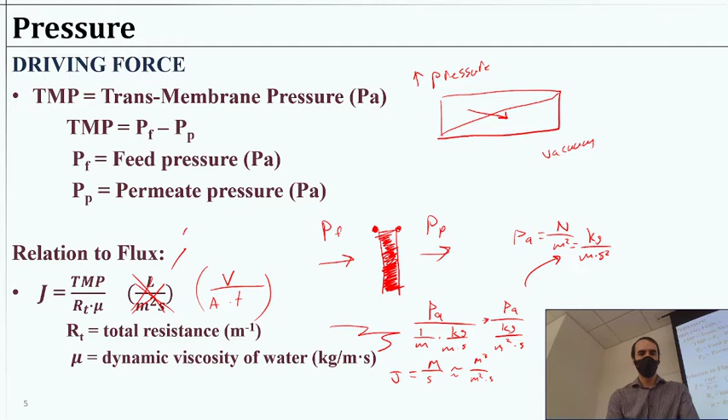Okay, so now we could maybe look at it, but okay, anyhow.

Membranes, generally, if we were to take a look at them, almost every membrane is going to have two features. First, the separation layer, the very thin component that's actually preventing small stuff from getting through, and then a support layer acting as a layer that's not doing any separation. We don't want anything getting stuck in that layer. We want water to flow as freely as possible through it, so it's going to be very permeable as much as we can, but it's going to keep a structure and support system for the separation layer, so that the separation layer doesn't experience any breaks or cracks from the pressure with particles.

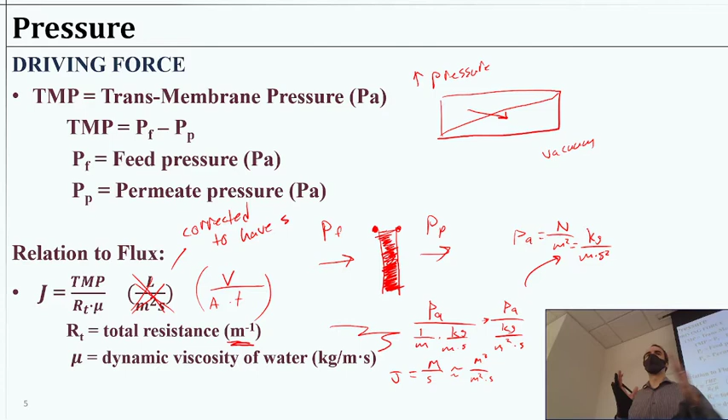If we go back a step and look at our flux equation as it relates to the pressure and the resistance, this resistance term, RT, that total resistance, the units are per meter. So this is some description of how much resistance the water is encountering per distance it's going. So the water is getting slowed down, lagged, whatever you want to call it, as a function of how far it has to make its way through that, which will be obvious when you think about it.

When we operate a membrane, we definitely want to operate it so particles flow in a direction where they encounter the separation layer first, not the support layer first. That way particles get stuck on the outside of the separation layer and flow away with the retentate stream. If we operated the other way, they may get stuck inside the support layer and start clogging it up pretty bad, making it hard to remove.

Another thing to consider in membrane operation, which is pretty much universal, is fouling. Junk gets stuck onto the filter. The stuff we're trying to remove is removed, but where does it go? We'd like to wash it all away, but sometimes it accumulates, and sometimes microorganisms get involved. Essentially, a layer of particles deposits on top of the membrane, and as we keep filtering we get more and more layers until we get what we call a cake. So we're doing cake filtration through that cake of foulants, which acts like a membrane or separation layer itself. That plays a role when we talk about resistance.

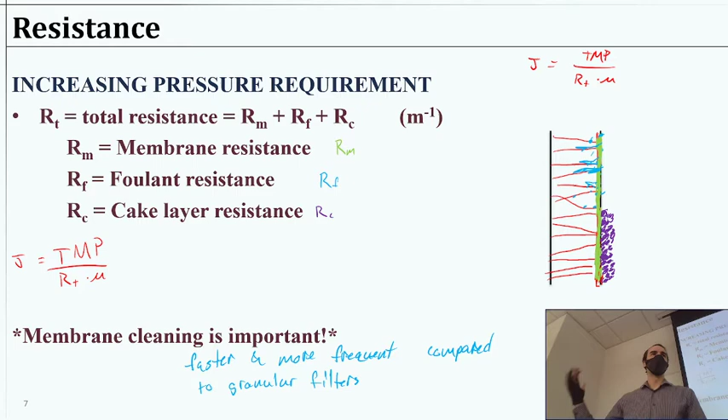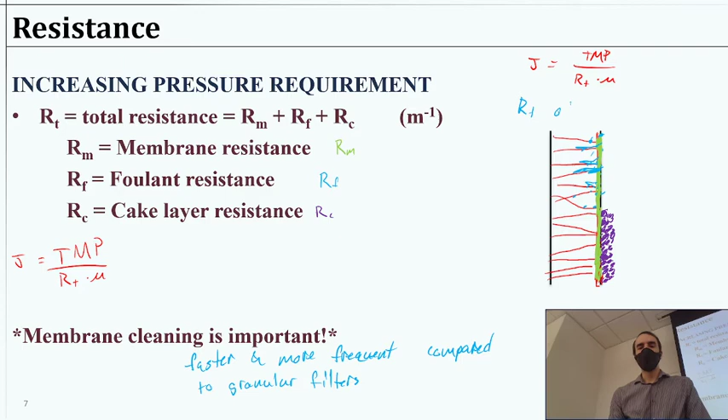So any problem we deal with involving resistance is going to be pretty straightforward, just going to have to make sure we're in per meter units. And these are usually very large because if you think about it, per meter, you don't have a full meter of a membrane, right? That would be a very, very large distance unnecessarily to push water through. So if you're looking at the pressure divided by a per-distance resistance, if you have a very narrow resistance, the pressure and flux numbers come out reasonable if that resistance is very large on a per meter basis. So you'll see when we do some problems, R of T is often 10 to the 12th or something like that per meter, plus or minus a couple orders of magnitude. But just be prepared if you solve a problem like this and you're freaking out that 10 to the 13th per meter sounds weird - that's actually typical for this type of problem.

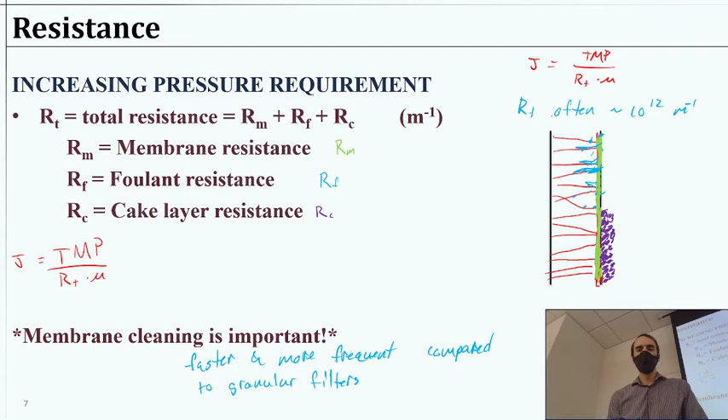Okay, so I wanted to talk just a little bit more about the types of fouling with this picture and introduce another concept, similar: permeability. So another relationship we can make between flux and pressure is what we call permeability, or LP. And we'll say that the permeability is equal to the flux divided by the pressure.

So if you think about different types of soils, you've probably learned about that. Sand is going to be very permeable, clay's not so much. You can think about it in terms of, if I pour some water onto the soil, what kind of flux, what kind of flow are we getting through some area of that water, given that it's got gravity pulling it through. You're probably not going to get clay allowing anything through, whereas sand, it'll permeate right on through. So it should be a kind of familiar concept here. There's not a whole lot to it other than just defining it that way.

And the units here then would be, if TMP is in pascals, meters squared seconds per kilogram. So again, permeability is flux over pressure.

And here's a few more examples of the fouling that we might see that would be limiting the permeability. So if we were to reduce this permeability value, you can see that ratio of flux to pressure is decreasing. We need more pressure to get the same flux if we have changed the permeability. So if we completely block the pores, the pore plugging or pore blocking, then we're literally reducing the number of pores that water can go through because they're blocked, or maybe just a very small bit of water can go through.

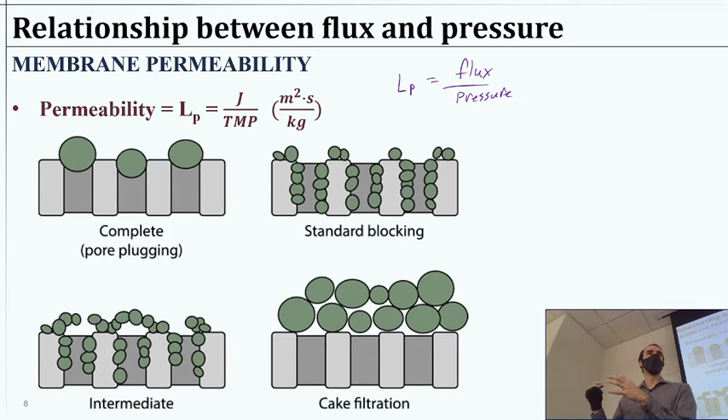So at some level, you're just ramping up maybe linearly, and then suddenly you hit that cake filtration, and you've got a little bit more exponential, something like that. I don't remember the specifics, and there's a lot of research going on about all that, but that would be the reason to separate them, because that's going to tell you how much increase of pressure you have to have given which regime of fouling you're in, which is going to dictate that pressure flux relationship. So you'd want to operate your membrane and have a backwash system in place that's accounting for that properly, or expecting that.

So I'm going to give you a few minutes to work on that. I'll remind you real quick that...

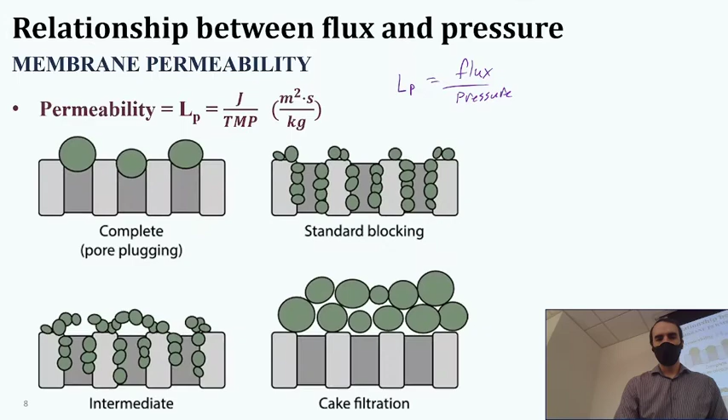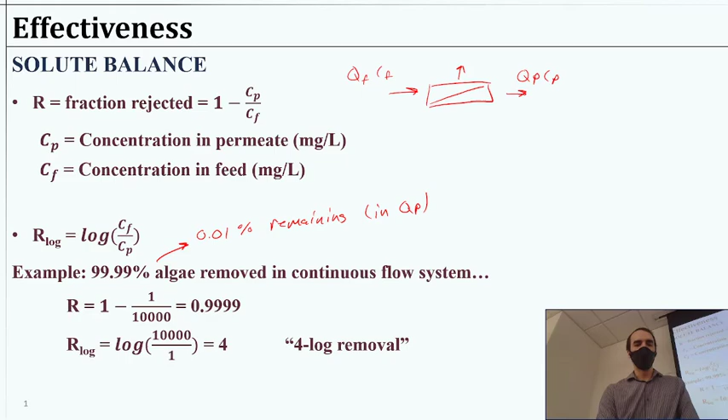And the rejection, of course, is going to be the fraction, concentration-wise, of how much is rejected. I'm just going to skip back up to the slide so I make sure I'm not confusing anybody, not trusting my memory at the moment. So this uppercase R, fraction rejected, is 1 minus the concentration in the permeate divided by the concentration in the feed. This is what we covered at the beginning of last time, so just kind of reminding all of us here. So 1 minus Cp over Cf, concentration in the permeate divided by the concentration in the feed. And of course you can add the 100% if you wanted to go from fraction to percent.

Okay, so with that, go ahead and give this a shot. See if you can solve that system.

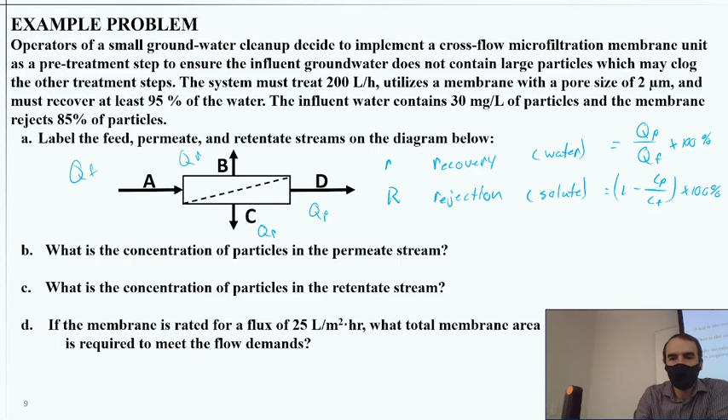And honestly, that is intuitive. I'm giving that equation to you, I'll give that to you on an exam, but it is very intuitive. So make sure to be double checking with yourself on that intuition side of it.

So 95% of 200 is 190. So QP then is 190 liters per hour. That leaves us with 10 liters per hour available for the retentate stream, because we're not losing or creating any water here.

Okay, so that's our flows then, and we should have enough information now to solve that mass balance. So it's the QF, so 200 liters per hour, times the CF, the concentration in the feed, that was 30 milligrams per liter. So I'm just taking this, and that's going to be equal to our 190 liters per hour times CP.

We solved for CP, that was 4.5 milligrams per liter. All that plus our 10 liters per hour times what we're solving for, CR.

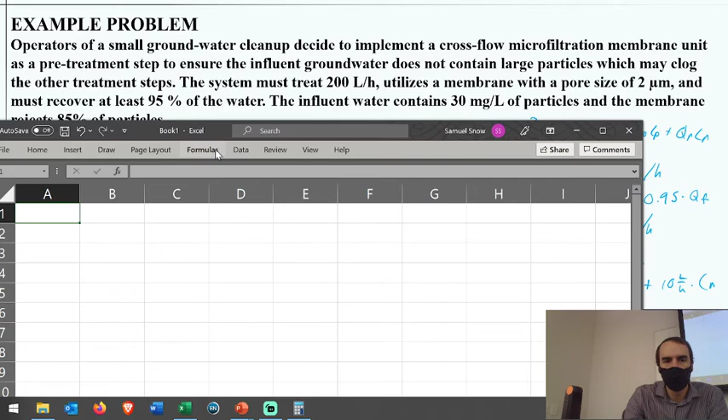So let's take 200 times 30. I'm going to subtract the QP, CP from both sides. So subtracting 190 times 4.5. And divide all that by 10.

So our concentration in the retentate then should be 514.5 milligrams per liter. And as a mental double check, you should expect that this is going to be a lot higher than what you had in the feed, right? If you got a number that was lower than what's in your feed, you know immediately something went wrong, because you're having a concentrating effect here. So CR is 514.5 milligrams per liter. So that's part C.

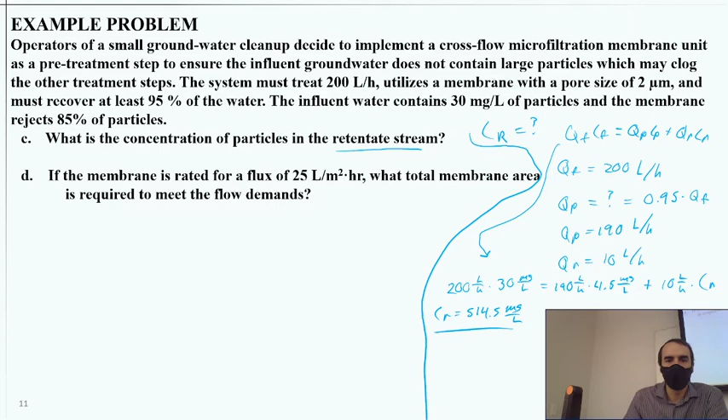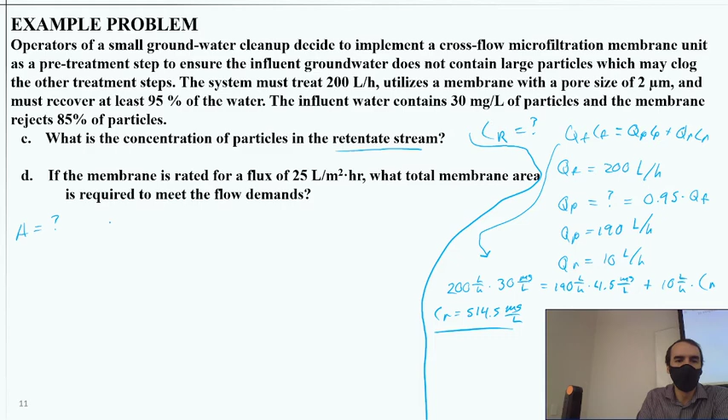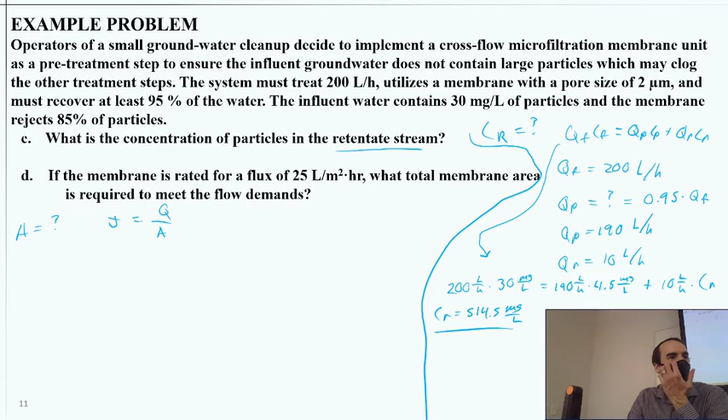So part D, we're asking what is the total membrane area. The membrane area is going to be related to our flux. We know that our flux is a flow rate divided by area. So very simply, you might be thinking, oh I've got a flux, what's the pressure? But you might not even need the pressure. We can do calculations between flux and pressure, but in a problem where we know the flow rate and we know our desired flux, we can use those pieces of information to solve for our area.

So area then would be Q over flux. Now the Q here, this is the Q permeate, right? The flux across a membrane is described by the amount of water that actually gets across the membrane. This is not the Q feed. Keep that in mind when you solve problems, that the flow rate we're talking about is important. So this is actually going to be QP: 190 liters per hour divided by the flux that was given, which was 25 liters per square meter per hour.

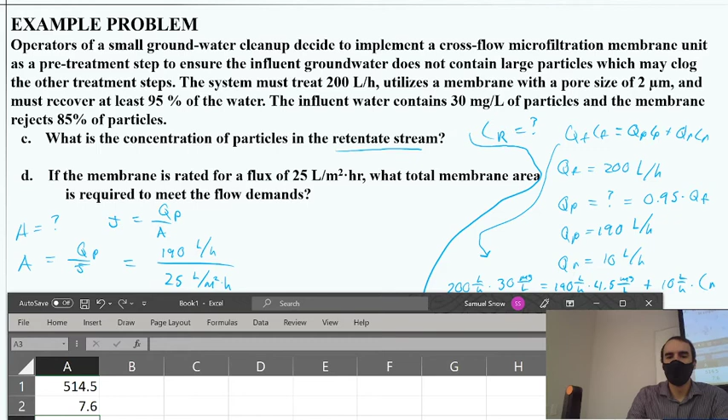And we can solve that. Those units should come out where the liters per hour cancel and the per square meter comes to the top. And so that gives us 7.6 square meters. Does that make sense?

So I'm just going to write a little note: use QP for the flux across a membrane. Okay, some more space for that.

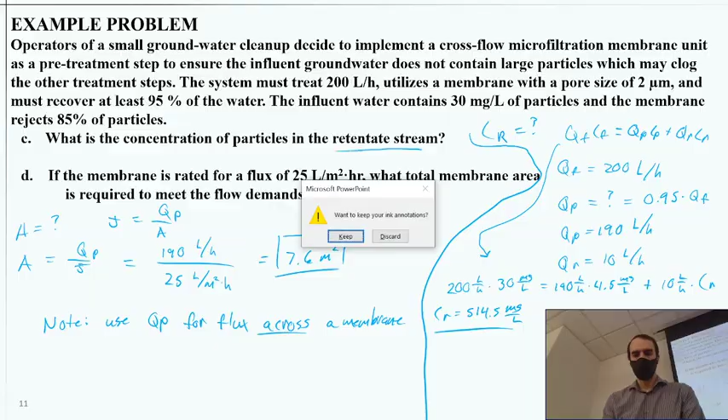All right, so I like to get us started talking about disinfection in terms of sterility versus disinfection. So who believes that the water in my bottle has been disinfected? Presumably, right? I got it from a water fountain or something, from a tap, so hopefully it's been disinfected. Now, who thinks then that this is sterile water? Okay, so a lot of you know better from being in environmental systems. You often ask this with the civil engineers, and a fair amount of them say, well, what's the difference? It should be sterile, right? Well, no. Actually, there's going to be millions, if not billions, of microorganisms that I'm about to drink.

Pleasant thought, right? So sterility is when we're describing the case where any organisms, either they're not living or they're otherwise unable to replicate. We would call certain hybrid animals, donkeys for example, as sterile because they cannot reproduce. They're not able to bring offspring based on their gametes and all that biology. If we cause a microorganism to no longer be able to replicate because we damage its DNA, perhaps it's still functioning and living, but it has been sterilized. So it's not actually a complete destruction per se, but that's a very different definition than what we say when we're talking about disinfection.

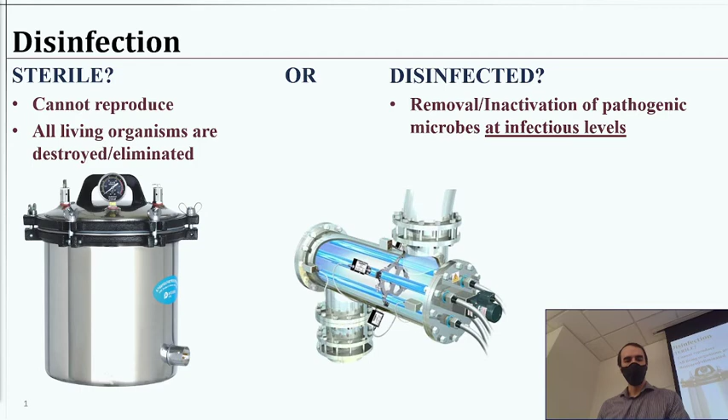I want to come back and talk about that in a minute, but just as a show of it, disinfection is almost always coming right just past our filtration of some sort. We're going to talk about water softening, which I have not done a unit on before. We'll talk about that after disinfection. That would normally, sometimes it might happen before disinfection actually. So we might have water softening here as another step, but essentially disinfection is last or almost last, right before we send it out. And I say almost last because I think it's going to matter a little bit based on pH, what pH we want. In fact, we might do some of the softening beforehand, and then we adjust the pH for disinfection, and then we polish the water afterwards.

That polishing step is usually describing making sure that it's got the right hardness, the right amount of residual chlorine, and perhaps fluoride in it to trace the distribution system and provide that health benefit.

So essentially, we are towards the end of a typical drinking water treatment train. The next couple of topics are really going to be dealing with those spots.

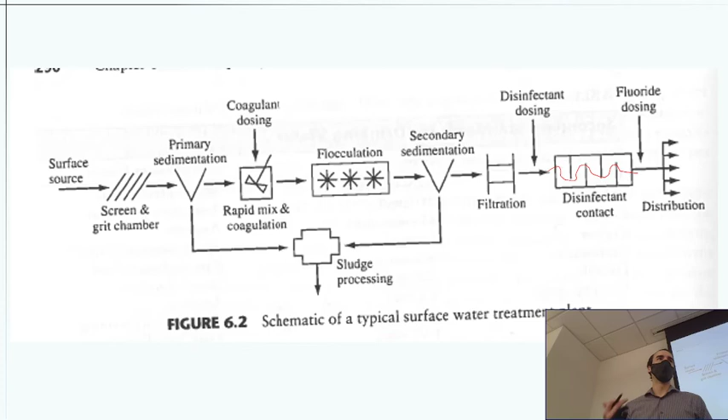Occasionally, some treatment plants might try to pre-chlorinate a little bit. I think we had an example problem, maybe with ozone or something. There's a bit of a worry about disinfection byproducts. One thing we want to do during all these steps, including filtration, is to remove precursors for disinfection byproducts—removing organic matter that could react with our chlorine and create hazardous chlorinated compounds.

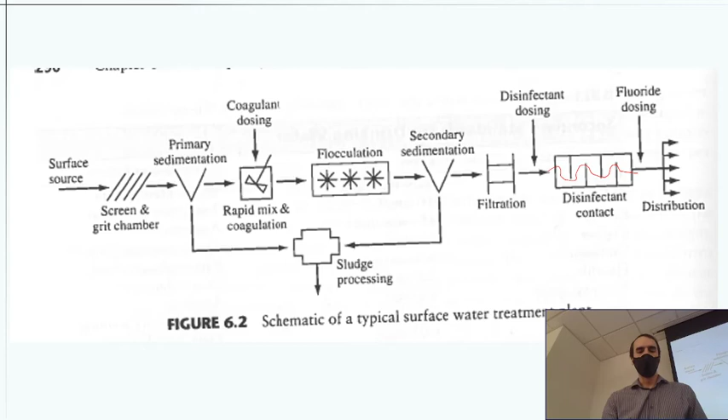We don't want that. So there's a few reasons why we keep disinfection last. And if not for the disinfection byproducts, certainly we don't want pathogens being able to hide in and behind particles. So particle removal is actually quite important for disinfection.

Okay, so talking about disinfection, how do we know what is an infectious level? Does anybody know how we would know the infectious level of norovirus or coronavirus, for that matter?

We're not typically concerned about coronavirus for ingestion hazard, although it may well be able to give you GI symptoms—it does have a GI component. But talking about water, we're normally talking about waterborne diseases: norovirus, rotavirus, or bacteria. We could do cholera, E. coli, et cetera, et cetera. Does anybody know how we measure that?

So it's quite entertaining, actually. I had a chance to take a couple of classes at Emory during my graduate school, and they had some speakers from the CDC come over to talk about the public health side of microbiology. What I learned was they do human experiments on volunteers, saying, okay, we're going to pay you $1,000 to come stay in our little hotel-hospital thing for a week. We're going to feed you exactly what we know is good, clean food, so there's no other confounding factors.

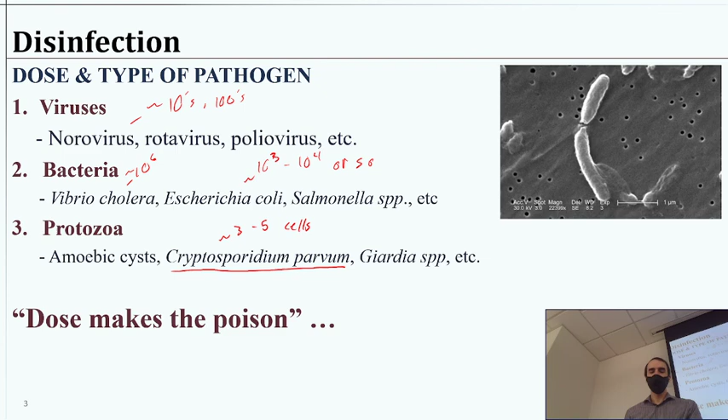Okay, so this brings me to John Snow. But this one did know something. I do have a brother named John. He maybe fits the bill of not knowing anything a little closer, at least in my opinion.

Game of Thrones reference there for anybody curious. John Snow is called the father of epidemiology for tracking an infamous cholera outbreak in London.

So back then it would be kind of the plague, right? The plague struck near Broad Street in London, and ultimately what he did was he tracked it to a water source. It was the Broad Street pump that was supplying contaminated water. This is the first time the germ theory of disease was just starting to catch on, if at all. And what he did was he made a map of who was dying in this area.

It's a very morbid thing to do, but with the craziness of such an outbreak that kills people so quickly, that's got to be really scary, right? So it was very urgent to try to figure out what was going on.

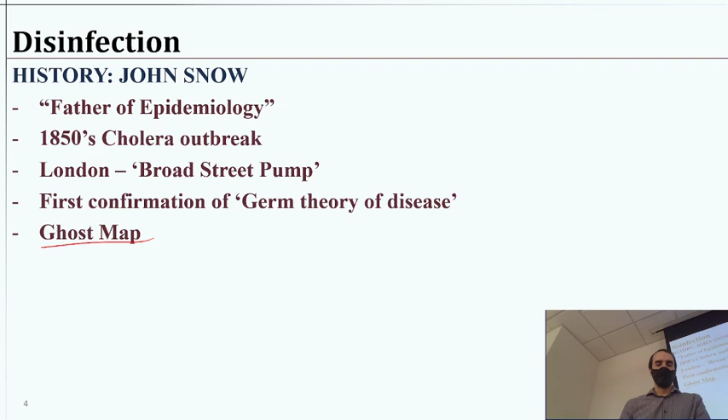And the map that he made is referred to as the ghost map. There's also a book - it's a literary adaptation of the historical account, so they filled in some details to make it a narrative. It's a very good read, enjoyable, interesting, and informative. So if you ever visit London, you got to go visit the Broad Street pump.

Essentially, he stopped the outbreak by removing the pump handle from that pump. It turns out that there was an infant that got sick from traveling somewhere else, brought the infection there, and was living in this house right above the Broad Street pump well. So essentially, without very good sanitation there, their sewage was seeping down into the well for the Broad Street pump, which is not good in the first place, but pretty awful anyway.

But the deal was, since it was an infant, and the digestive tract is different, infants are actually, while vulnerable, not so prone to dehydration with this disease. The infant stayed alive for several weeks, and may have even survived - I don't remember - but it was not a quick death for the infant. So it was actually a continuous production of Vibrio Cholera contaminating the well at that spot.

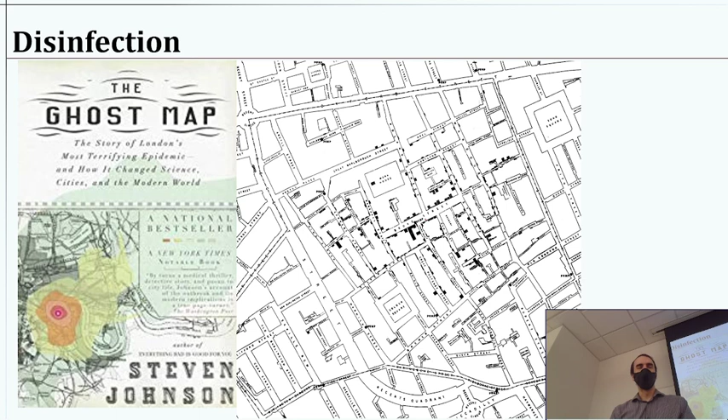So if you look closely at this map, you'll see dark bars, and I've got another picture to show better. But each dot represents one death in the house. So as you get longer and longer bars, that's more deaths per house. It's kind of insane to think about, but within the span of a few days, there were tens, if not 100 or so - I think there was more than 100 deaths - and some houses would just be completely ravaged. Very terrible. You can see it a little easier plotted this way.

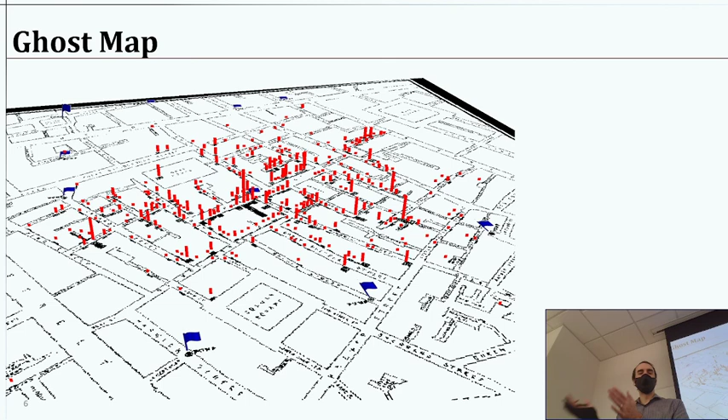It's definitely morbid, but also fascinating. And so mapping disease like this, tracking rates, is really what epidemiology is about, which is the field my wife has worked in for some time.